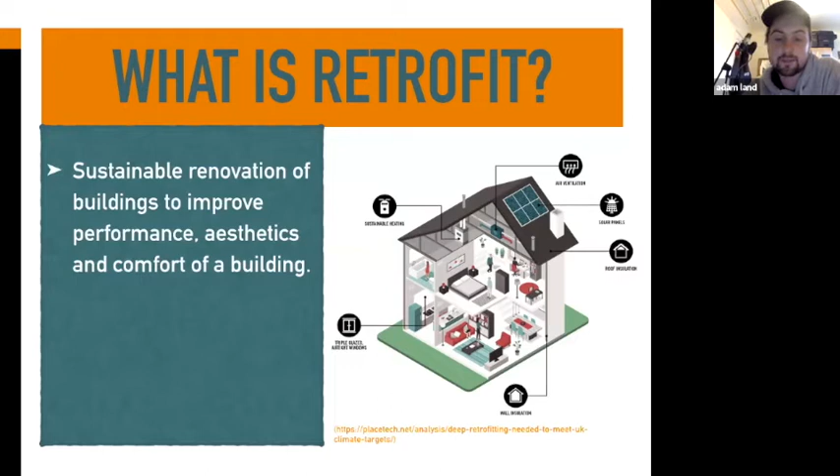So only 25% have been built since 1980, which is when insulation became kind of standard and enforced. So there's obviously a huge chunk of those houses that have got no insulation or have maybe been retrofitted later on.

There's also an increased awareness of health in buildings. I don't know if people have heard of sick building syndrome. So people getting ill and not knowing why they're getting ill, and then removing themselves from buildings, offices or houses, and realizing that it's the house, the materials it's made of, or the damp, humidity, that kind of thing, that is giving them health problems. And I think that people are becoming more aware of this kind of thing: poor air quality and damp and toxicity of paints and finishes, all of that kind of stuff.

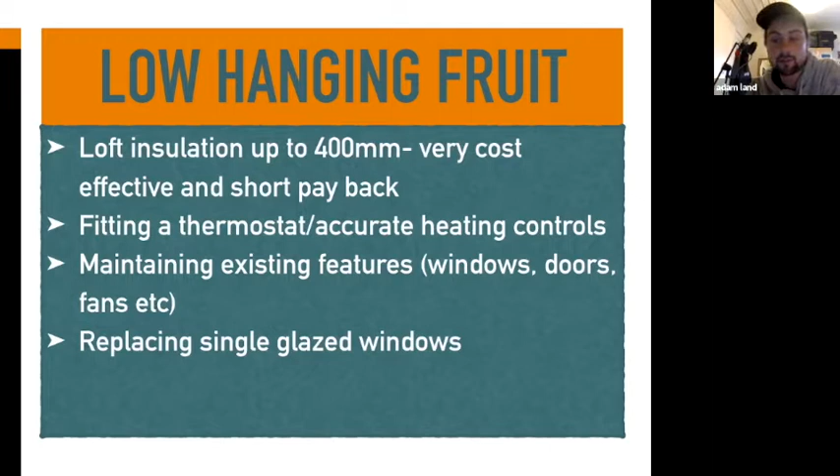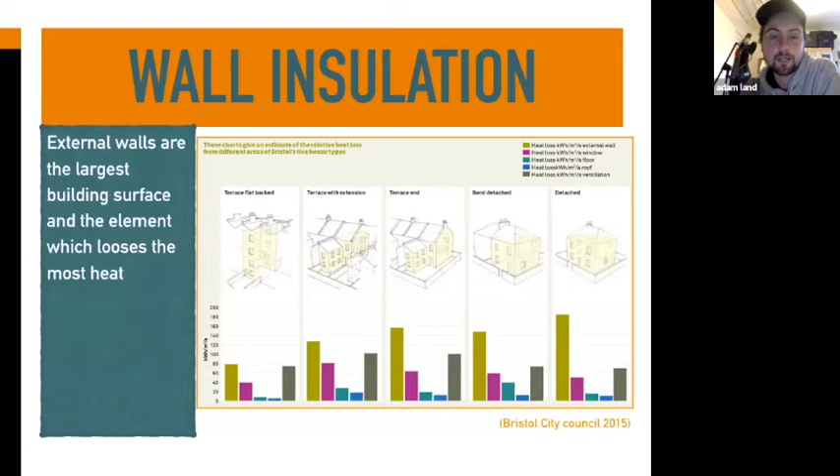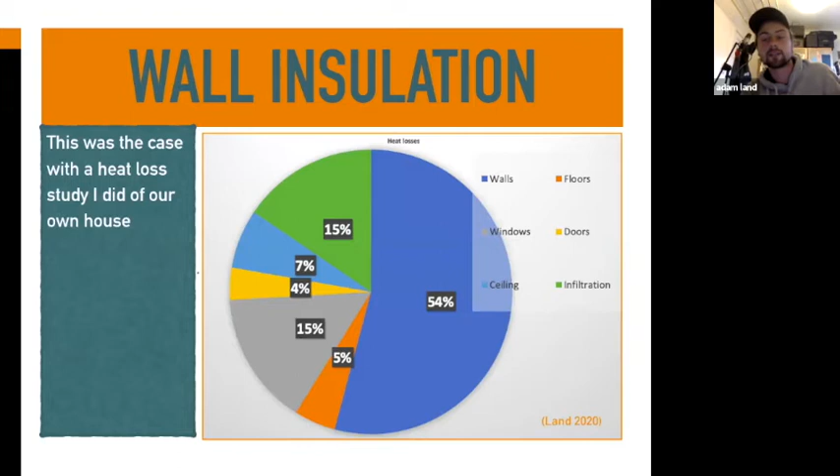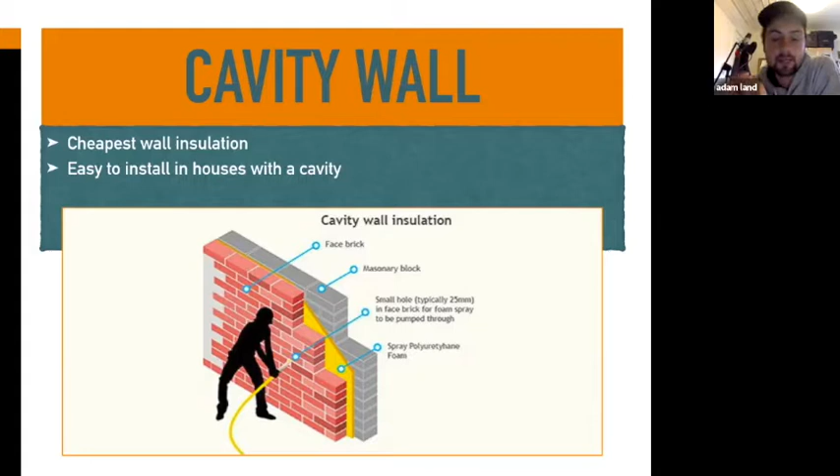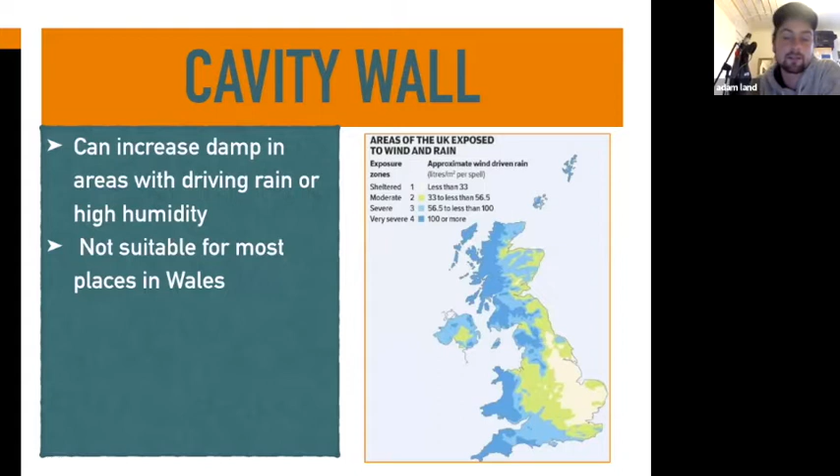It's cheap to do. You don't have to knock down any walls or anything. But yeah, it's pretty cost effective. The only issue is that it can increase damp. So if you look at this map, the bits in blue, which we are well into, is basically the places it's not suitable for. So anywhere with driving rain and wind-driven rain, it's not really suitable for. You could end up exacerbating a lot of the problems that you're trying to get rid of with damp and that kind of thing. So what can you do if you can't do cavity wall?

External wall insulation is the sort of creme de la creme of wall insulation. So it's the most thermally efficient. It creates a full envelope, so there's no gaps. It goes around all the corners, goes up to the windows, all of that kind of thing. And I've put this as a positive: it can change the aesthetic of a building. So if you're doing up the outside of a building that's pebble dash, you can put whatever finish on it. It could improve it. But obviously, if you've got a beautiful Victorian or period property, covering it in wood fibre or polystyrene and then rendering it could make the building look a lot different. You might not get planning permission for it, that kind of thing.

And it's expensive to install, so you've got to put up scaffolding, which is just painfully expensive. And you may need to bring out the eaves, for example, or you may need to alter certain details in the house. So you need the insulation to be covered, so you might have to extend the eaves, which are the hanging out bit of the roof. And it's not suitable for party walls, which are the walls in between two houses, the partition walls, because you'd have to ask your neighbour if they could have it on the inside of their bedroom, which they're probably not going to be up for.

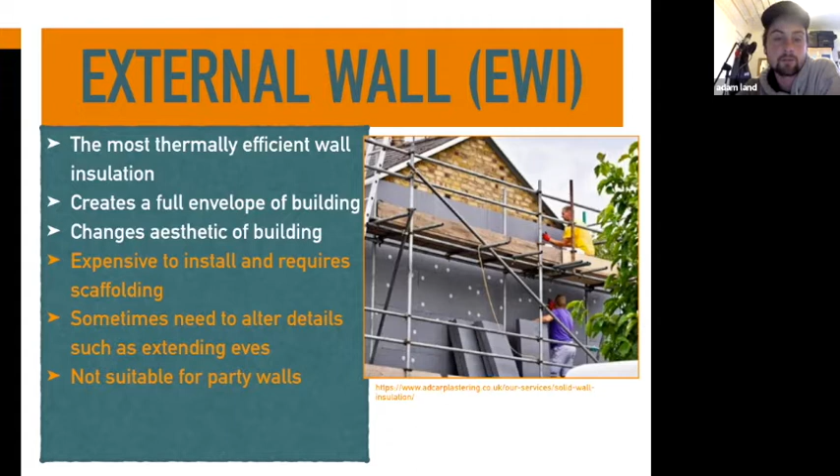So the other option is internal wall insulation. So that's exactly the same material, natural or unnatural, on the inside of the building, which is less disruptive. You don't have to get scaffolding. It's much cheaper because you don't need to spend so much time on the outside of the building. And also, it's not going to change the look of the building. So if you've got a listed building, period building, that kind of thing, internal wall insulation is the most suitable for that.

The only issues with that is you bring what's called the dew point into the building. So rather than keeping the whole building warm, you bring the point at which water condenses into the wall. So if there's any wood in there, there's risk of it rotting, all of that kind of stuff, your stud work, lintels, that kind of thing.

And obviously it reduces the size of your internal floor. So as an extreme example, if you're using 250 mil of wood fibre insulation on the inside of your room, you're going to be losing that amount of space all the way around. So that's a significant amount of your room that you're going to lose. If you live in a huge old house with massive rooms, then that's not going to be an issue. But if you live in a pokey little bungalow, you might not be able to afford to lose that.

I guess the reality is probably you might want to use a bit of both. So, you know, if you have a beautiful front to your house that you want to keep, you might use internal wall insulation on that. And the back, you might use external wall insulation where it's less likely to upset the look of the building.

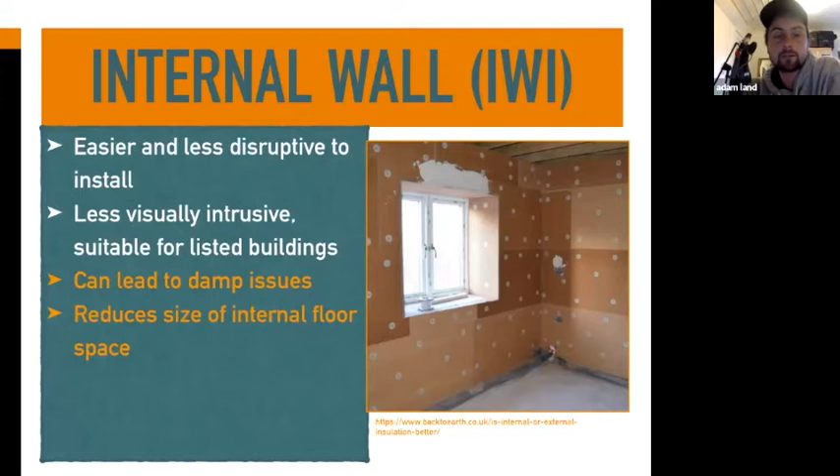A big question, I guess, is whether you use natural or non-natural materials. So I go into every situation like, natural materials, why would you not use it? And there's lots of benefits to that. They're less toxic, they're not going to release toxins to you or when they get thrown away, that kind of thing. They have a low carbon cost, or if they're made from wood, they have a negative carbon cost. So the trees sequester carbon when they're growing, and then it gets locked into the building until the building decomposes in 100 years' time, when hopefully we're going to solve this carbon thing, but who knows.

And also they're moisture open. So some people refer to it as breathable, which means that when the moisture in your building is high, it absorbs the moisture. And then when the humidity in the room is low, then it will release it. So it keeps the moisture in the air at a really healthy level.

And also older buildings which are already moisture open, such as stone buildings, that kind of thing, you have to use natural materials on that. If you do end up just painting on paint from B&Q, all of that kind of thing, you can end up locking in moisture. And quite often people will think that they've got a moisture problem because a pipe's leaking and all of that sort of stuff. And it's because they've got a cob wall, like earth wall, or they've got a stone wall, and they've just slapped on a load of latex paint or something like that, and it's sealed the water in, and you end up with damp inside the wall.

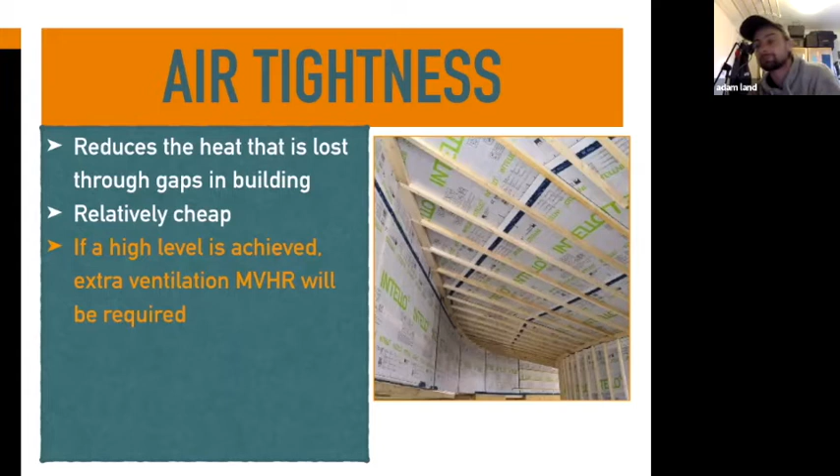Yeah, solar energy is an obvious one. I think a lot of people think of solar panels when they think of sustainable retrofit or even building. It's got quite a good payback period. So in a decade, you'd have probably paid back what you put into them. And if you're doing the external wall insulation, you've got the scaffolding up, all of that sort of stuff. It's quite easy then to just get someone in to put the solar panels on.

Solar panels are really cheap at the moment. It's the rest of the stuff, the inverter, that sort of thing, which can add up. But if you've got someone on the roof anyway, you might as well put solar panels on. There can be issues. It obviously massively depends on whether you've got a south-facing roof. So if you haven't got that, then solar panels are not going to work generally. You're only going to get a couple of hours of electricity.

Yeah, just quickly on the costs. External wall insulation is generally over £100 per square metre, probably looking at £150, £200 if you're going into wood fibre. So to put that in context, a detached house to fully do external wall insulation would be 17.5 grand, which is a pretty significant cost. And a terraced house about £7,000, just because you're only doing the front and the back.

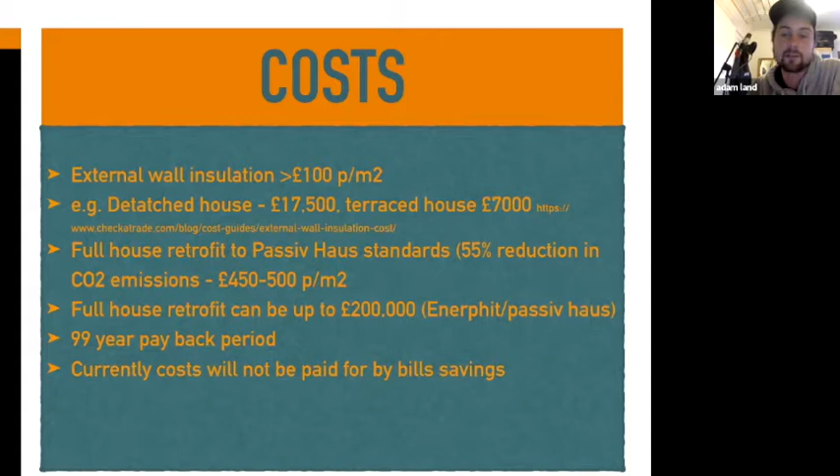Yeah, full house retrofit to the EnerPHit standard could be £200,000, and with that you're looking at a 99-year payback. So the savings on your bill would take around about 100 years. So the takeaway from this is, currently costs won't be paid for by bill savings, and we'll look a little bit at that and how we need to get around that in terms of getting retrofit to happen at a wider level.

So why is it not happening? Like Sue mentioned, there is a little bit of retrofit happening in Swansea, particularly. They've chosen to be the first place where they're going to start retrofitting council houses, and it's definitely in the discourse in government. Government are talking about it. There's a lot of hot air around it, but not at the scale that we need. It's estimated that we need to retrofit 500,000 homes a year in the UK to reach 2050 emissions targets. That is a really staggering number of homes, given that at the moment there's several hundred being retrofitted each year in the UK.

So yeah, we mentioned the low-hanging fruit. A lot of that's already been done. So I'd be interested afterwards to see who's got loft insulation, because I'd imagine most people have got loft insulation. So a lot of the easy measures have been done already. So now we're getting into the harder stuff, the external wall insulation, the windows, solar panels, all of this kind of stuff.

And yeah, as I just mentioned, retrofit currently doesn't pay for itself in bill savings, partly because the industry is very young, so the products are expensive, and there's not enough people that can do it. But also, I don't know whether it is ever going to pay for itself in bill savings, and whether we need to move away from that as our primary driver in terms of retrofit.

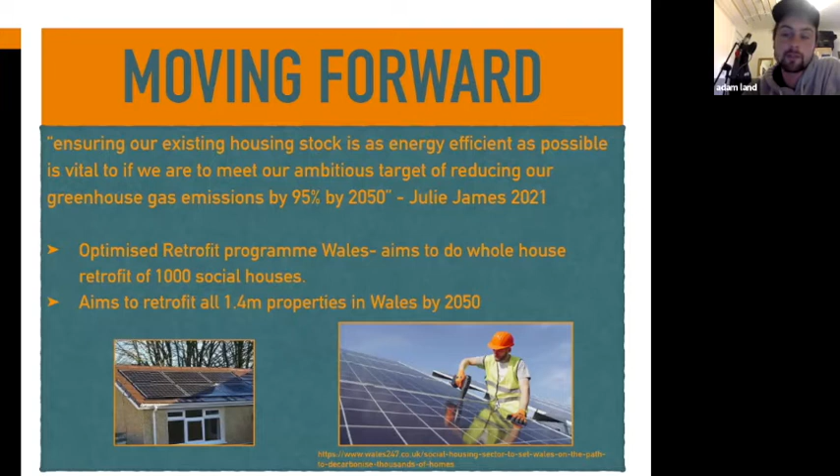But yeah, thanks for listening. If anyone's got any questions or just comments that they want to talk about, because like I said, I'm definitely not an expert in any of this. I've done a lot of research, but yeah, other people's thoughts would be really interesting to hear.

Okay, he says, thanks, Adam, for a great talk. Do you think do-it-yourself shiplap cladding with insulation behind it is a good option for external retrofit? And any idea of the cost for that on a detached house?

Yeah, I think you could either go with polystyrene insulation around it, and you can just shiplap straight over that, and then fix into battens behind the insulation. Or you could use wood fiber, but if you're using wood fiber, you'd have to protect it from moisture, so you'd have to be looking at some sort of membrane around it, which is totally possible, some sort of breather membrane.